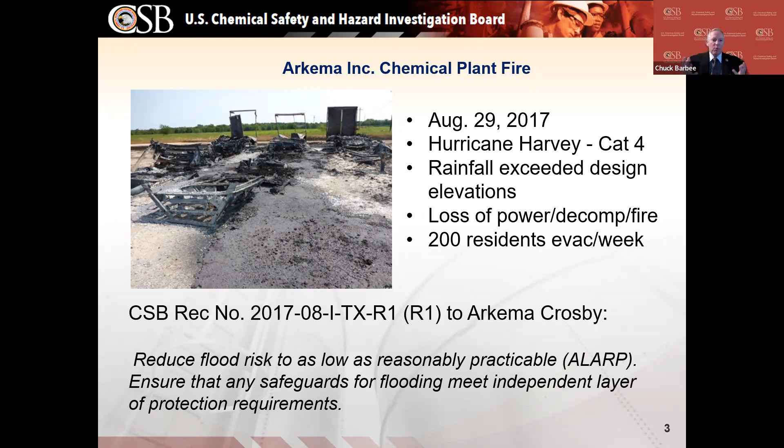Next slide, please. So in the implementation of R1, and this took a little while, I want to emphasize before we start going through it how much they had to do. They completed a site elevation survey and hydrology study. Then, based on the assessments there, they implemented all of the requirements.

They underwent a PHA using the layers of protection approaches as we recommended. And in rebuilding their facility, in addition to addressing the flood elevation issues, they had to get all of their permits back in place. And as a result of what happened, Harris County, where Crosby facility is, they updated all their permit standards. So it was quite an evolution, but they went through all the permit process for all their buildings and everything.

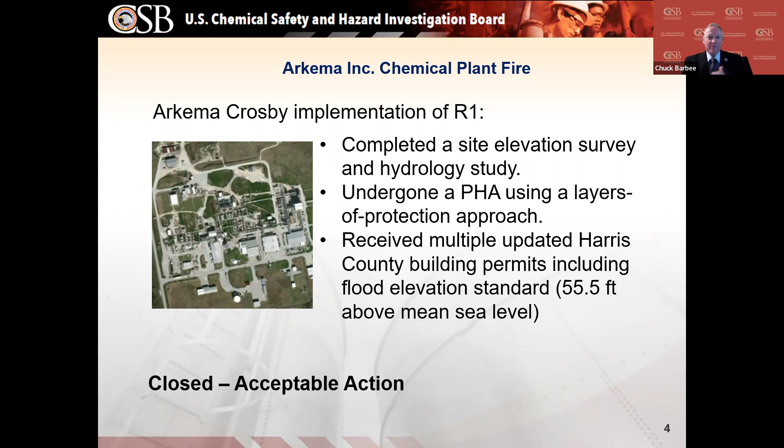They had to update all their firefighting and other components in the buildings, and they eventually did it, and they provided a tremendous amount of paperwork to evidence that they had. And as a result, the board voted to change their status to closed acceptable action. So I would say great job, Arkema Crosby facility.

The next recommendation we're going to talk about came from the pressure vessel explosion at Loy-Lange Box Company. This happened in April of 2017. A pressure vessel ruptured and propelled out of the building into another building. The rupture was due to an inadequate repair, and as a result, there were 4 fatalities. One worker who was there locally at the scene when it happened, and then 3 members of the public where the pressure vessel had propelled.

As a result of the incident and the investigation, the CSB issued a recommendation to Arise Incorporated, who were the inspectors who oversaw the repair. We asked them to include prescriptive elements in their boiler and pressure vessel repair and alteration inspection and acceptance process that would prevent acceptance of a non-conforming repair or alteration. And the reason we asked for this is actually the inspector for Arise, when he went through the process, he executed the process that they had correctly. The process just was not adequate.

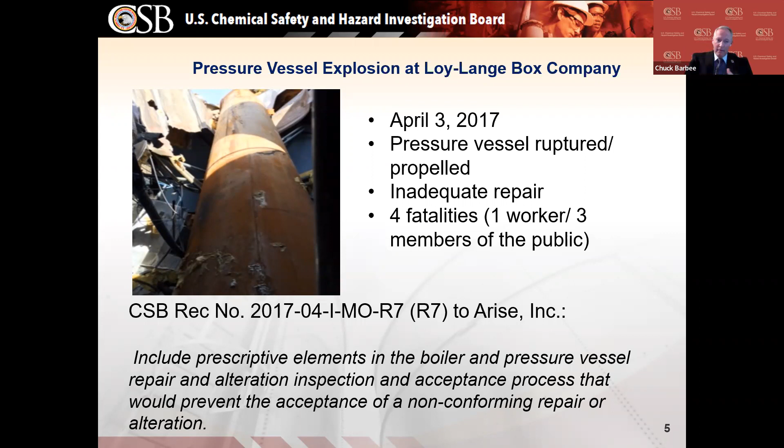Next slide, please. What did Arise do in the implementation of R7? Well, they updated their quality processes. Now that included additional inspection points, or hold points, as they refer to them, to verify repair compliance.

So in other words, a repair could be started, but until that inspector came in and verified certain aspects of it, they had to hold that repair until the inspector did buy off on it.

Now, in addition to those extra inspection points, they also put in an annual audit requirement by inspector supervisors to verify that those new inspection points were included, in addition to other things the supervisor had to verify regarding the work of the folks they were supervising. So as a result of the documentation they provided, the board voted to close this, or change the status of this recommendation to closed, acceptable action, also on January 17th. Good job to Arise Incorporated.

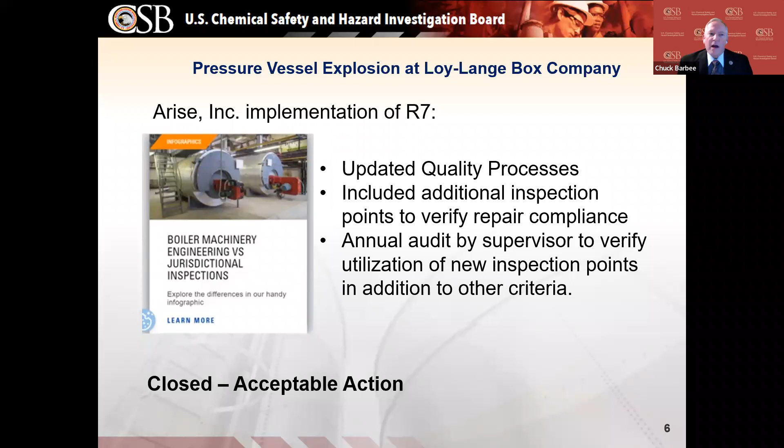Thank you, Chuck. The next presentation will be on the accidental release event that occurred at the TPC Group plant in Port Neches, Texas. Butch Griffin was the investigator in charge. Supervisory Chemical Investigator Lauren Grim will be making the presentation. Lauren, please proceed with the presentation.

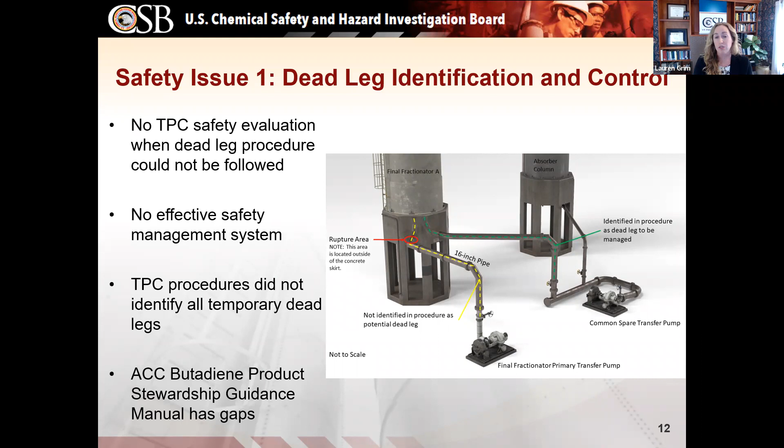In addition, TPC's dead leg procedure did not identify all potential temporary dead legs within the unit, which likely contributed to personnel not taking action to prevent popcorn polymer formation in the dead leg created by the out-of-service pump. Further, the American Chemistry Council's Butadiene Product Stewardship Guidance Manual does not contain information on the potential consequences of dead legs or how companies should identify, control, or prevent them.

The second safety issue is process hazard analysis action item implementation. TPC's 2016 PHA team recommended that TPC ensure that piping associated with out-of-service equipment and high purity butadiene service be flushed monthly. Implementation of this recommendation could have helped prevent the incident by requiring personnel to flush the piping associated with the out-of-service pump, which could have prevented the buildup of popcorn polymer within the dead leg. However, the 2016 PHA recommendation was never implemented, and the dead leg conditions leading to the incident were not mitigated.

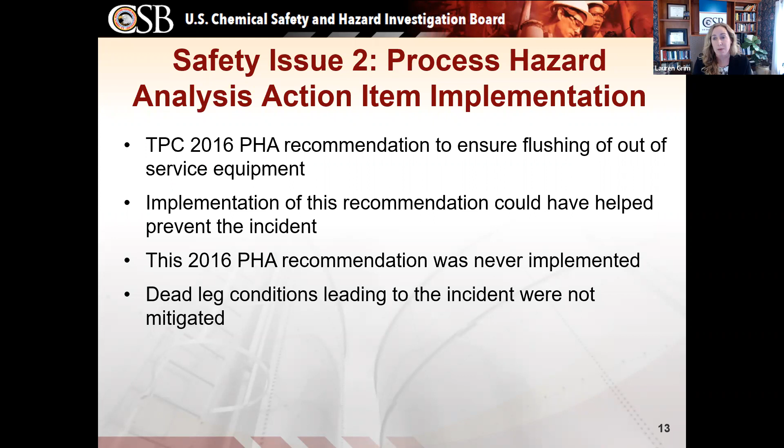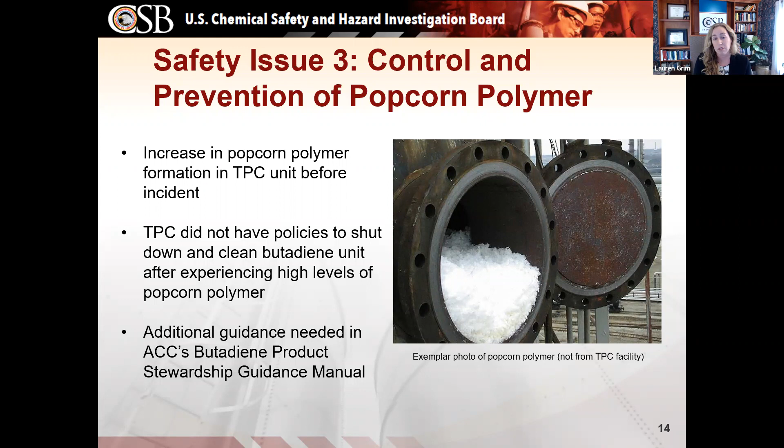Our third safety issue is the control and prevention of popcorn polymer. TPC was conducting operational trials leading up to the incident, and after these trials began, an increase in popcorn polymer formation occurred throughout the butadiene unit. The CSB determined that TPC did not have sufficient internal policies to lead employees to shut down and clean the butadiene unit after it experienced exceedingly high levels of hazardous popcorn polymer. The CSB also determined that additional guidance in the American Chemistry Council's Butadiene Product Stewardship Guidance Manual, providing mitigation strategies that facilities should follow when popcorn polymer is identified, could help prevent future popcorn polymer-induced loss of containment events.

And the fourth and final safety issue is remotely operated emergency isolation valves. The TPC butadiene process was not equipped with remotely operated emergency isolation valves designed to mitigate process releases remotely from a safe location. The TPC incident demonstrates what can happen when portions of a chemical processing facility cannot be remotely isolated during a release and fire.

Severe explosions caused a process tower to propel through the air and land within the facility, other process towers to fall within the unit, extensive facility damage, and fires that burned for more than a month. Manual and locally controlled emergency block valves are unreliable in this type of catastrophic incident, since the valves cannot be safely accessed in these major incidents, the equipment cannot be isolated.

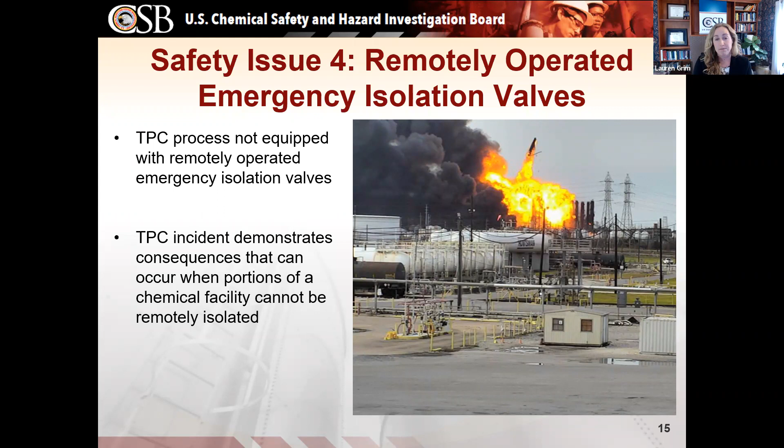The CSB issued five recommendations as a result of this investigation. To TPC, the CSB recommends that: 1, TPC develop and implement a program to identify and control or eliminate dead legs; 2, that TPC passivate equipment in high purity butadiene service; and 3, that TPC incorporate the recording of any paper-based process performance information into TPC's electronic records management system.

To the American Chemistry Council, the CSB recommends that: 1, the ACC revise the Butadiene Product Stewardship Guidance Manual to include guidance on identifying and controlling or eliminating dead legs in high purity butadiene service; and 2, that ACC revise the manual to provide guidance on a methodology to identify what should be considered excessive or dangerous amounts of popcorn polymer and mitigation strategies.

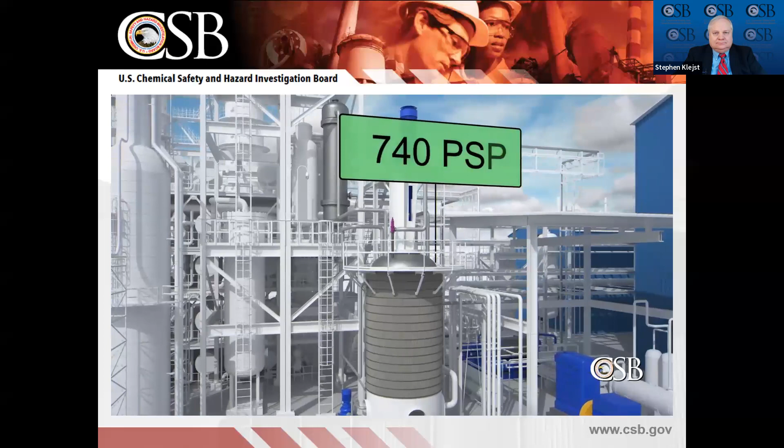Kuraray shut down the Pasadena plant on April 6th for a maintenance turnaround and to install various equipment upgrades. By May 18th, Kuraray operations personnel were taking steps to bring one of 4 reactors back online. The reactor, known as Eval Reactor 2, looked similar to the others, but had a lower maximum design pressure of 740 psi. The design pressure of the other 3 reactors was 1150 psi.

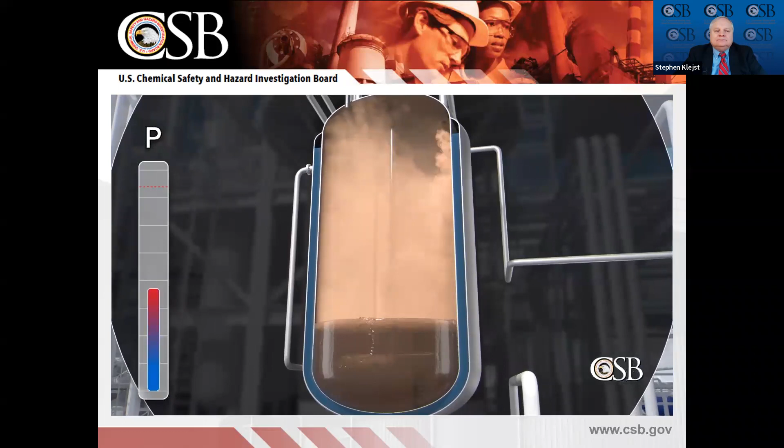The reactor already had liquid methanol and ethylene vapor inside as operators began incrementally raising the reactor system pressure. They did so by adding additional ethylene vapor. Pressure was raised in order to reach the target pressure necessary for the reactor to start up, while also checking for leaks. In the meantime, chilled liquid from the plant's newly installed refrigeration system was circulating through the reactor's heat exchanger.

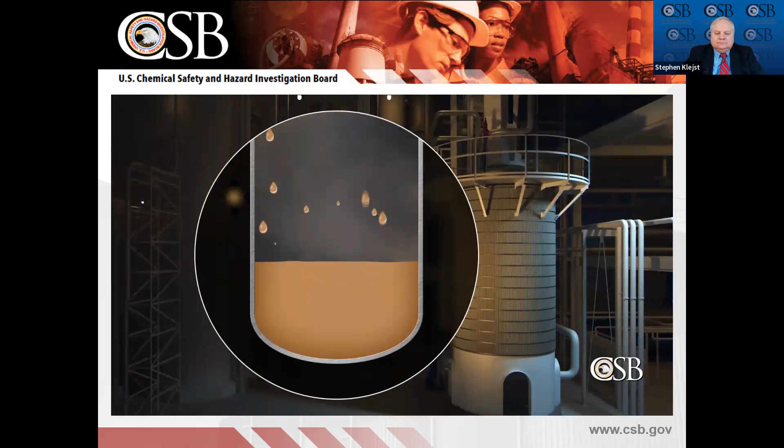After 11:20 p.m., the reactor pressure, together with the low temperature from the chilled liquid, created conditions that allowed the ethylene gas in the reactor to condense to liquid. This caused the temperature in the reactor to decrease. Around 7 a.m. on May 19th, a supervisor noticed the low temperature in the reactor and instructed operators to stop circulating the chilled liquid through the heat exchanger.

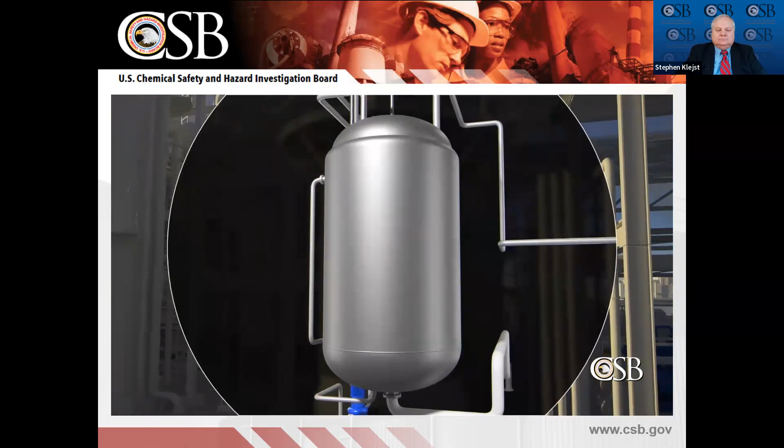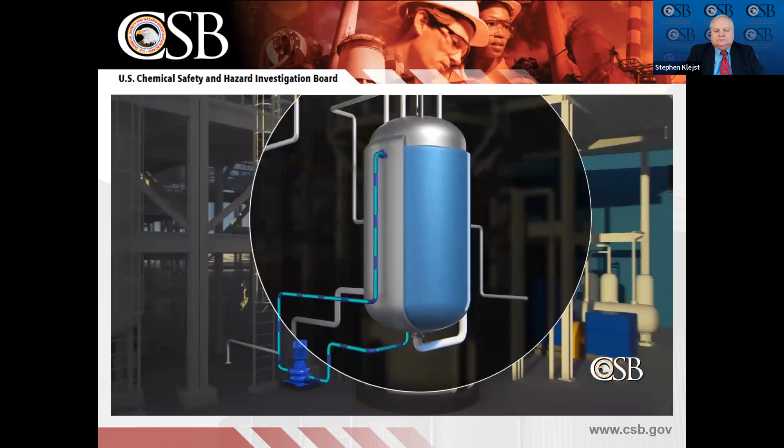The reactor was surrounded by a heat transfer jacket, which uses water to control the temperature inside the reactor. To further help warm the reactor, Kuraray personnel periodically added steam to the jacket, increasing the temperature of the water.

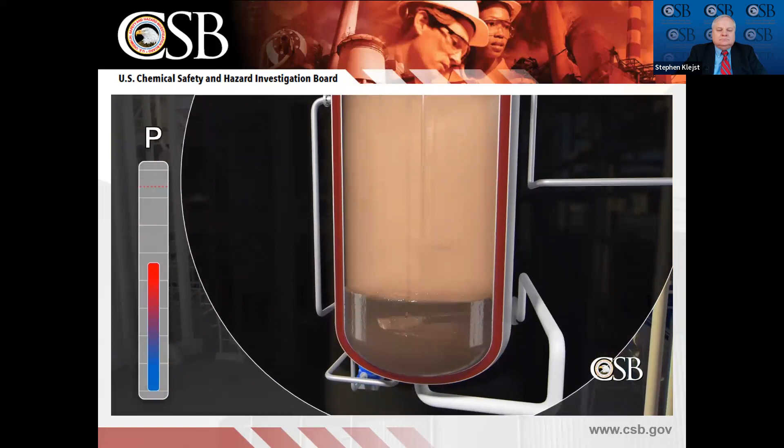As the temperature of the reactor increased with each injection of steam to the heat transfer jacket, some liquid ethylene inside the reactor vaporized. This raised the pressure inside the reactor. By about 8:45 a.m., the reactor reached the target operating pressure of nearly 600 psi, but pressure continued to increase.

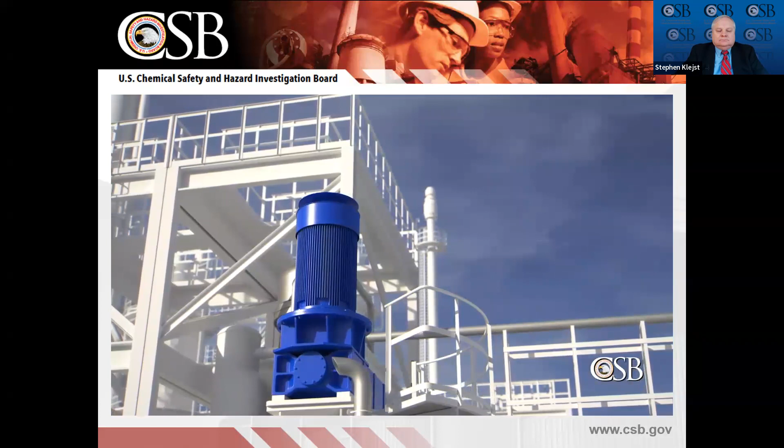Around 9 a.m., the pressure reached 640 psi, and the high-pressure alarm went off. A board operator responded by periodically opening a pressure control valve to send some of the vapor inside the reactor to a flare. The board operator was concerned about exceeding environmental emissions limits for the flare, so he did not fully open the pressure control valve.

He was also focused on other startup activities and did not realize the valve was not open as much as it needed to be to bring the pressure under control. Pressure inside the reactor continued to climb.

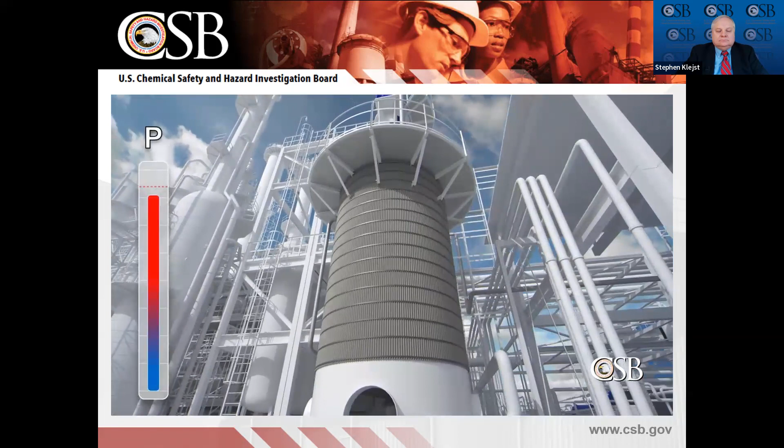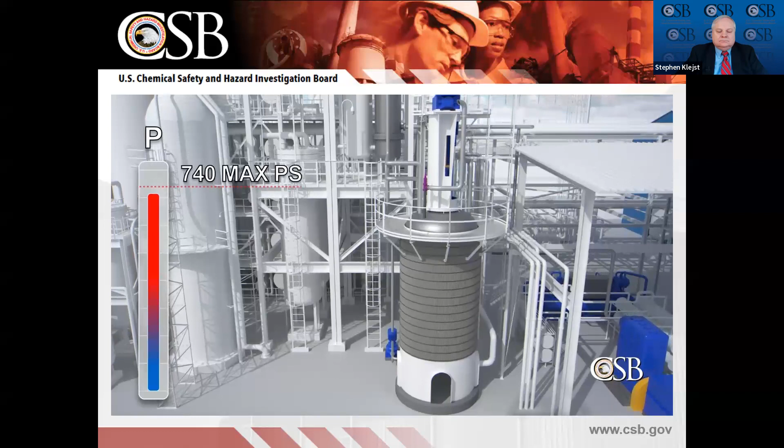Shortly after 10 a.m., operators initiated the next step in the startup. At that time, a new board operator took over and noticed the pressure in the reactor was over 700 psi. But the operator did not recall that this reactor had a maximum design pressure of 740 psi. He thought it could withstand higher pressure like the others.

Like the first board operator, the new operator only partially opened the pressure control valve, not realizing how dangerously close the pressure was to the reactor's limit. The partially open control valve was not enough to relieve the pressure in the reactor.

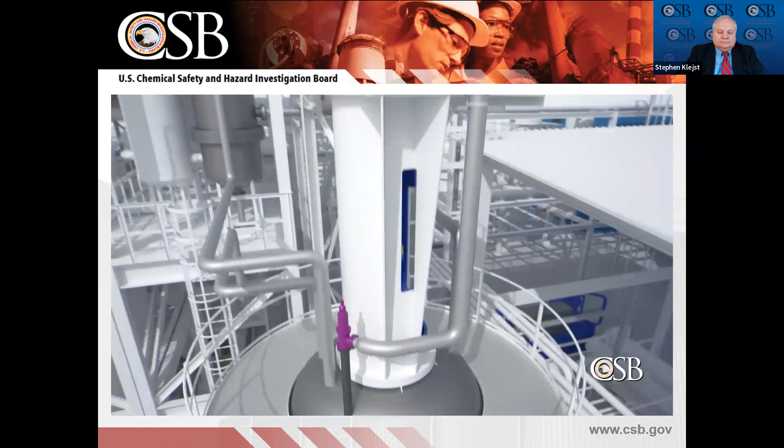Shortly before 10:30 a.m., the emergency pressure relief system activated. High-pressure ethylene vapor discharged from the reactor into the atmosphere. It was released horizontally toward an area where many people were working, rather than vertically to a safe location. Soon after, a nearby welding machine likely ignited the vapor, and a large fire erupted.

23 people were injured, many as they urgently tried to evacuate. The ethylene-fueled fire stopped after approximately 3 minutes, when the emergency relief valve closed as pressure in the reactor normalized. In total, over 2,000 pounds of ethylene was ejected to the atmosphere.

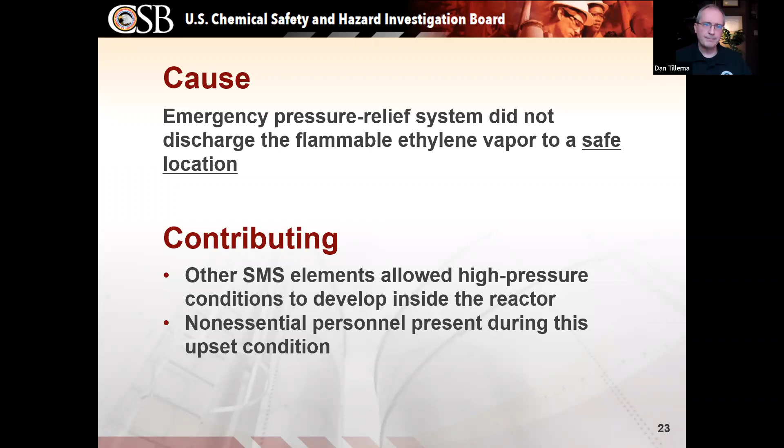Our report details these 17 safety issues identified during the investigation. There are also 47 findings that stem from these safety issues. As a result of these findings, the CSB issued 12 safety recommendations to address the gaps that still existed between our investigation findings and Kuraray's own post-incident corrective actions.

In our discussion today, we are focusing on the first of the 17 safety issues: the emergency pressure relief system discharge design.

Of all the factors that contributed to injuring the 23 workers, none was more significant than the design of the outlet piping from the reactor's emergency pressure relief system, which caused the release to be aimed toward an area where workers were present. Had Kuraray designed this piping to discharge the flammable ethylene vapor to a safe location, this incident could have unfolded in precisely the same sequence, but without harming people.

With well-designed outlet piping, the emergency pressure relief system should have discharged the excess flammable ethylene vapor vertically upward, well above and safely away from workers.

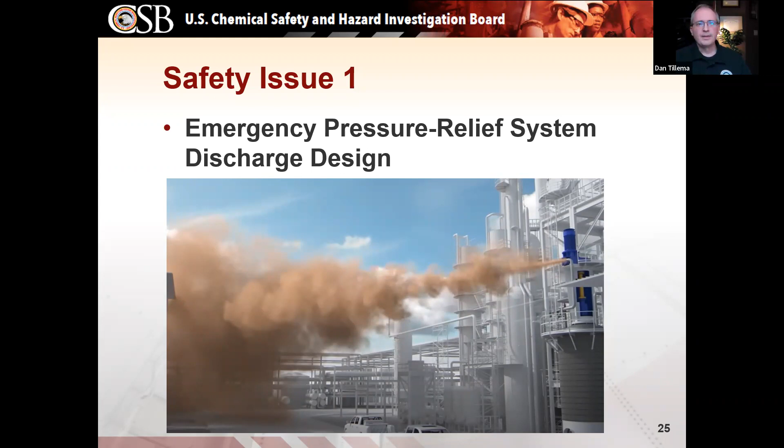Kuraray's emergency pressure relief system did not and does not discharge ethylene vapor to a flare.

The CSB has historically advocated against discharging flammable vapor into the ambient air when a flare system can serve both to contain the flammable vapor and then combust it safely. The CSB has stated that a flare system is an inherently safer option compared with dispersing flammable vapor into the atmosphere. Nevertheless, industry standards do provide users with guidance for directing flammable vapor vertically upward into the ambient air safely.

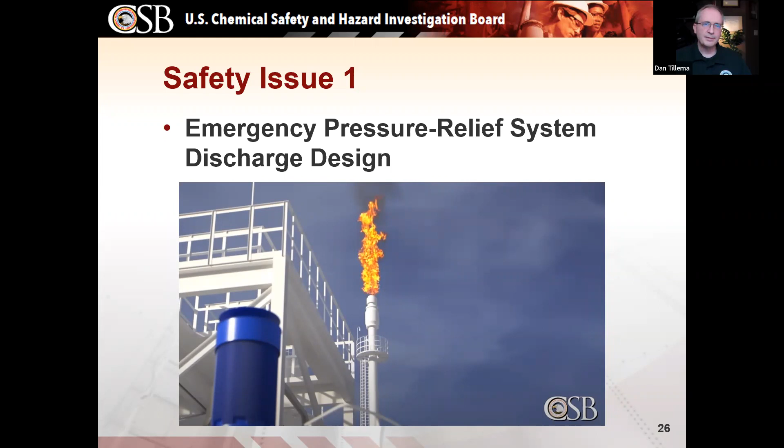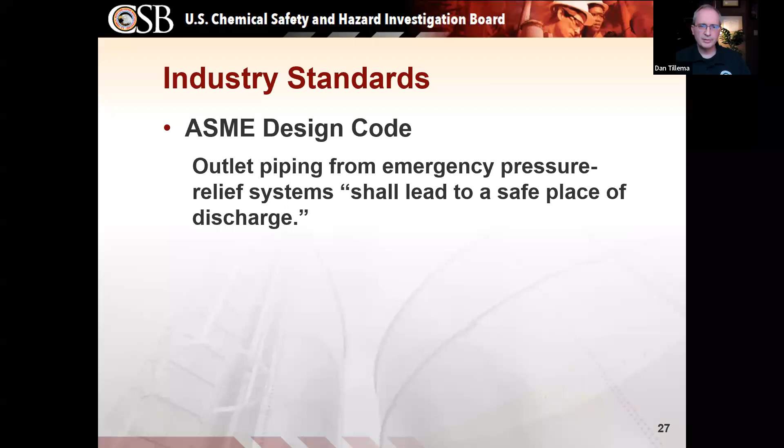The American Society of Mechanical Engineers Design Code, which is used to build many of the vessels in the chemical industry, including Eval Reactor 2, requires that outlet piping from emergency pressure relief systems shall lead to a safe place of discharge.

API states that published industry studies have shown that flammable gases can be discharged into the air safely by following the design guidelines in API 521. Among other considerations, emergency pressure relief system outlet piping should direct the release of flammable vapor vertically upward to satisfy these design guidelines.

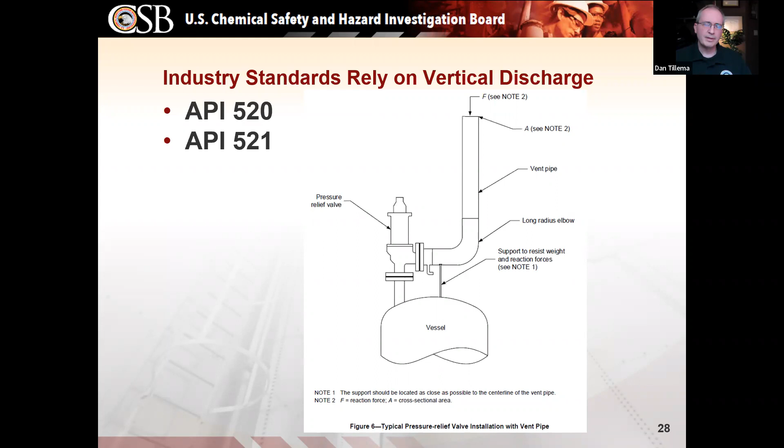Existing industry standards also answer the question of what is an unsafe location. API defined an unsafe location for discharging flammable vapor from emergency pressure relief systems in its industry guidance document, Performance Indicators, API 754.

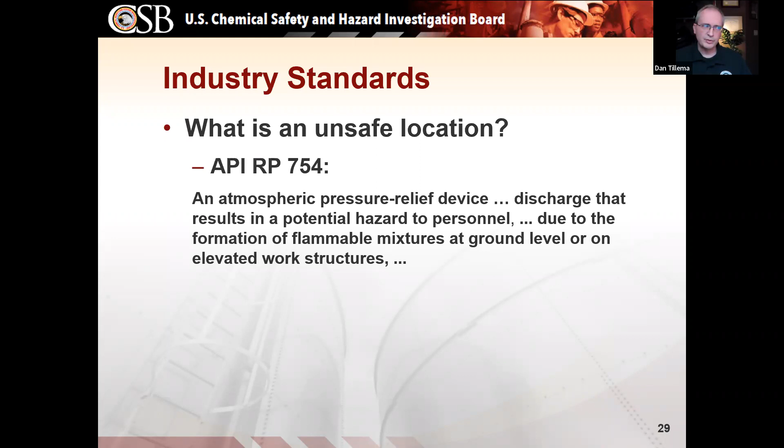According to API 754, an unsafe location includes an atmospheric pressure relief device discharge that results in a potential hazard to personnel due to the formation of flammable mixtures at ground level or on elevated work structures.

30 years ago, OSHA issued its final rule for what we now commonly call the PSM standard. In the preamble of this standard, OSHA stated: releases of toxic, reactive, or flammable liquids and gases in processes involving highly hazardous chemicals have been reported for many years.

Recent major incidents include the 1984 Bhopal incident, resulting in more than 2,000 deaths; the October 1989 Phillips 66 chemical plant incident, resulting in 23 deaths and 132 injuries; the July 1990 Arco chemical incident, resulting in 17 deaths; the July 1990 BASF incident, resulting in 2 deaths and 41 injuries; and the May 1991 IMC incident, resulting in 8 deaths and 128 injuries. Of the 5 chemical disasters that OSHA cited, 2 of these events, Bhopal and BASF, involved discharging chemicals from emergency pressure relief systems in a manner that caused great harm to people.

Notably, the BASF event resulted from not ensuring that a reactor's emergency pressure relief system discharged flammable chemicals to a safe location. The facts, conditions, and circumstances of the Kuraray incident show that the emergency pressure relief system for Eval Reactor 2 did not discharge to a safe location.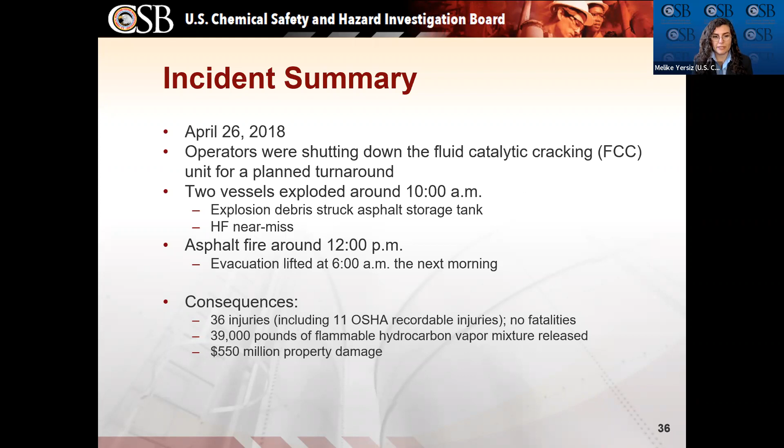Next slide, please. This picture was taken after the explosion, but before the asphalt fire. In the middle of the image, the star marks the location of the explosion. To the right, you can see tank 101, the asphalt storage tank, with asphalt pouring out of its side wall. It actually was high enough in the tank wall that the asphalt spill jumped over the containment wall and spread to the rest of the refinery.

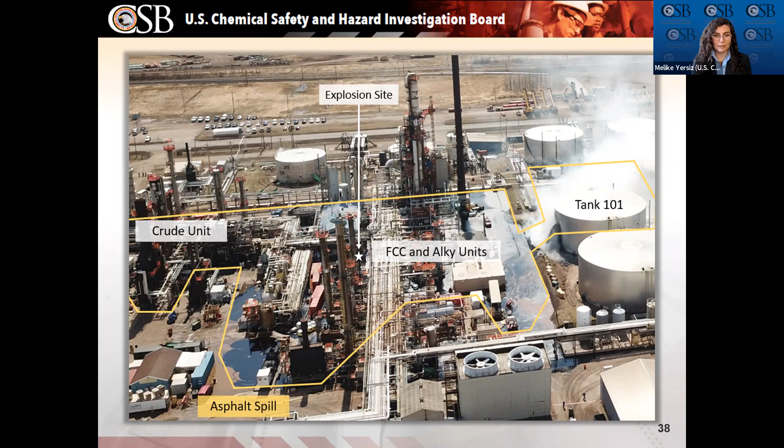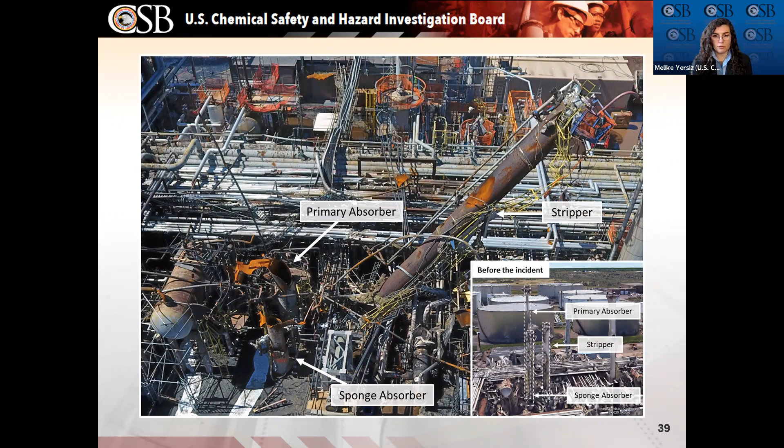Next slide, please. This is what remained of the two vessels that exploded, the primary absorber and the sponge absorber that you see on the left. Before the incident, these two distillation columns were actually taller than the toppled over column you see in this image right next to them.

Next slide, please. There were over 100 pieces that were scattered throughout the refinery, ranging from a couple inches to several feet. These are some photos of the larger pieces recovered after the incident. Next slide, please.

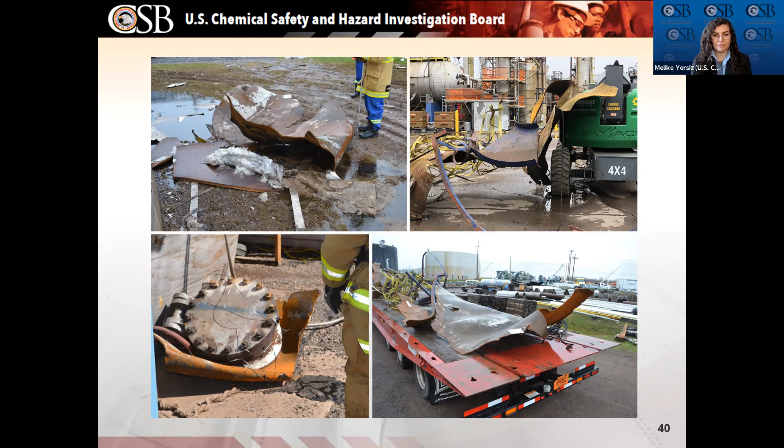The CSB determined that the Husky Superior Refinery explosion, which occurred during the shutdown of the FCC unit, was caused by inadvertently directing air inside the regenerator through the reactor and the main column, and then into the gas concentration unit. As the air continued flowing into the gas concentration unit, oxygen accumulated and formed a flammable mixture inside the two vessels that exploded. The oxygen also reacted with existing pyrophoric material inside this equipment, creating the ignition source for the explosion.

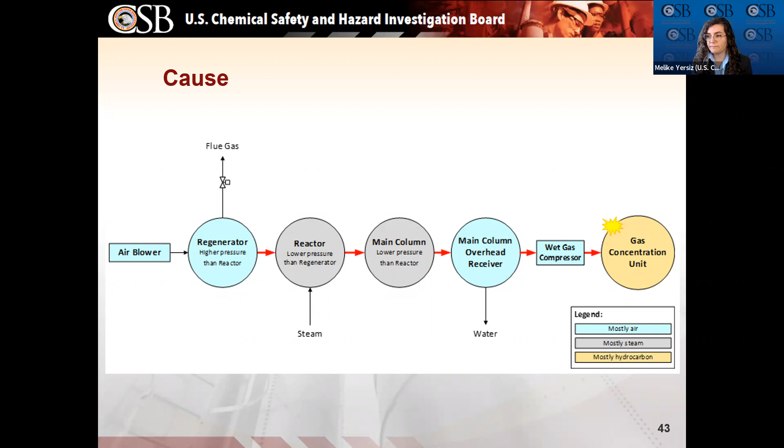The CSB identified 6 safety issues that caused this incident, and I will briefly go over them now.

The first safety issue is transient operation safeguards. Transient operation is defined as the operating mode when the process is in transition and is not in its normal operations mode. Examples include startups, shutdowns, standby, and emergencies. These are typically procedure-based operations, meaning workers follow a written step-by-step procedure to complete a task. In this case, it was an FCC unit shutdown, which occurred typically once every 5 years.

The CSB determined that during the FCC unit shutdown, the refinery's transient operation safeguards were either not implemented or not effective. For example, the refinery did not implement a reactor steam barrier, which involves injecting steam into the reactor to raise its pressure to prevent air and hydrocarbon from mixing inside the process unit. The refinery also didn't implement a main column gas purge, which could have prevented accumulation of oxygen inside the equipment.

The refinery only relied on catalyst slide valves for protection. These slide valves are between the reactor and the regenerator, and it's known in industry that they're not gas tight and they're not positive isolation devices. In this case, one slide was eroded, which made it more likely for air to leak into the rest of the process unit.

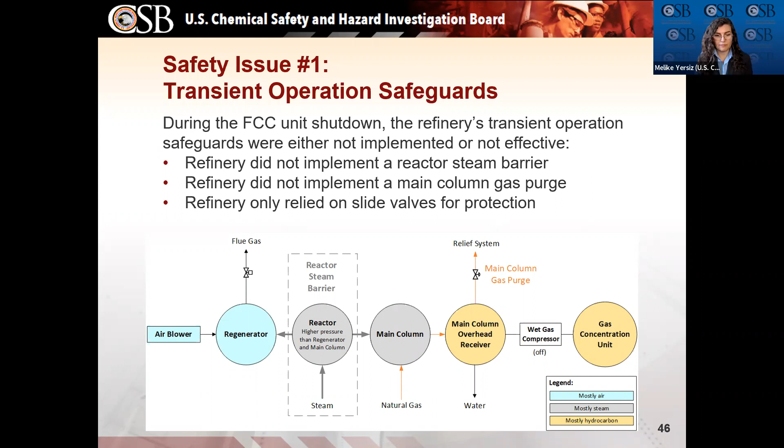The second safety issue covers process knowledge. The CSB determined that the refinery's FCC technology knowledge was not sufficient to safely shut down the FCC unit. The refinery's FCC expertise was mainly in-house with minimal engagement with other refineries. Furthermore, the shutdown procedure had not been technically evaluated for at least 25 years prior to the incident, and possibly since it was first created in 1960 when the unit was built.

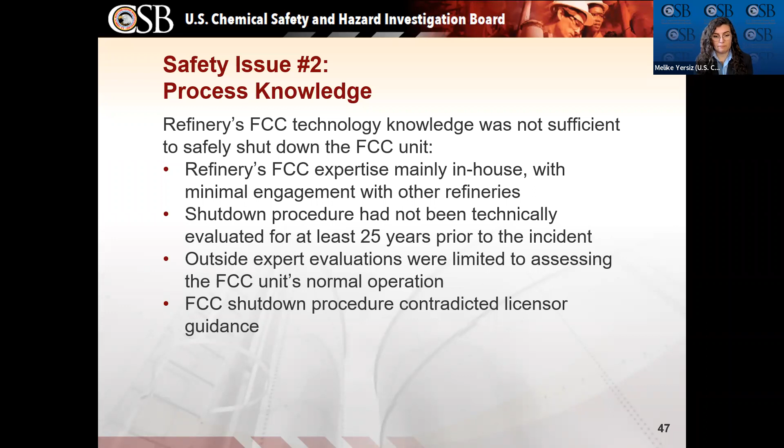Outside expert evaluations were limited to assessing the FCC unit's normal operation. As a result, for many years, refinery employees were not aware that their FCC shutdown procedure contradicted licensor guidance and put the FCC unit in an unsafe posture while they were shutting down every time.

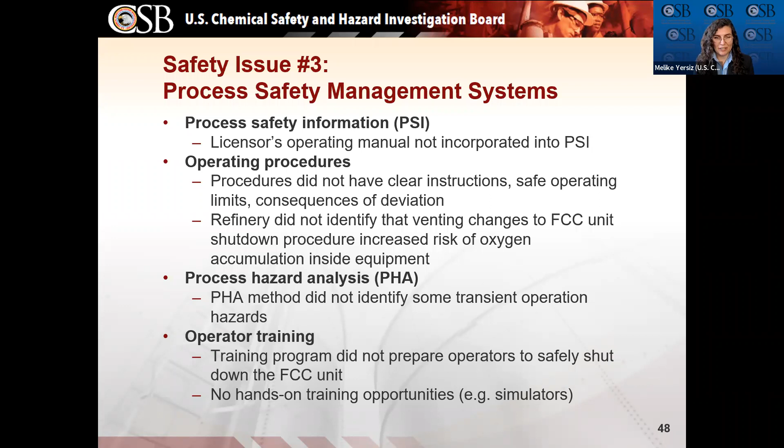The third safety issue covers process safety management system elements that contributed to this incident. The four that are discussed in this report are process safety information, operating procedures, process hazard analysis, and operator training. I will not go through them in detail here, but you can find more details in the report.

The fourth safety issue looked into industry knowledge and guidance. The Superior incident occurred less than a year after the CSB released its final investigation report in a similar 2015 FCC unit explosion in Torrance, California. In the Torrance incident, hydrocarbon flowed from the main column into the reactor, into the regenerator, until it found an ignition source in the flue gas system. Similar to the Superior incident, the CSB found that one of the causes of this incident was that the steam barrier was compromised.

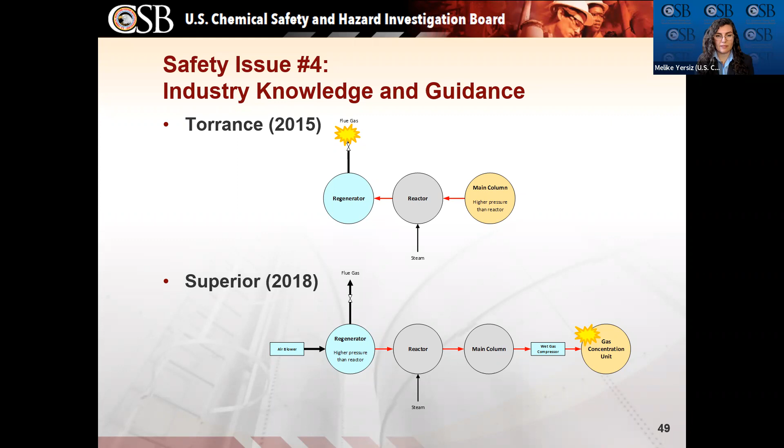The CSB determined that the Husky Superior refinery knew about the Torrance incident, but the workers did not recognize that inadvertent flow in the reverse direction was also possible. In addition, a lot of workers were not aware of the reactor steam barrier concept. The CSB determined that similar knowledge gaps may exist at other US refineries.

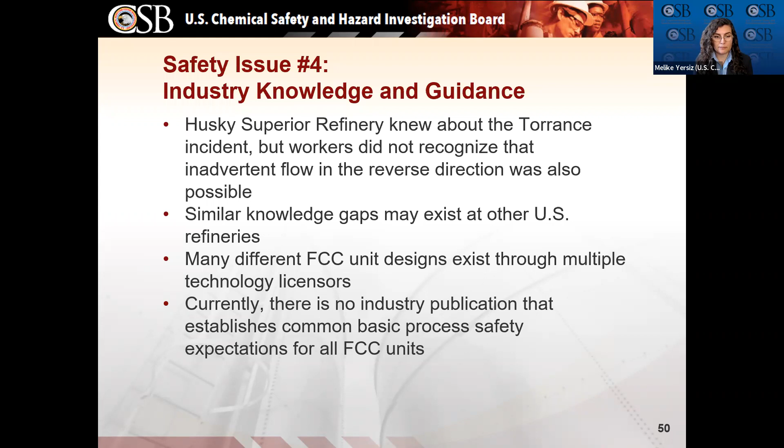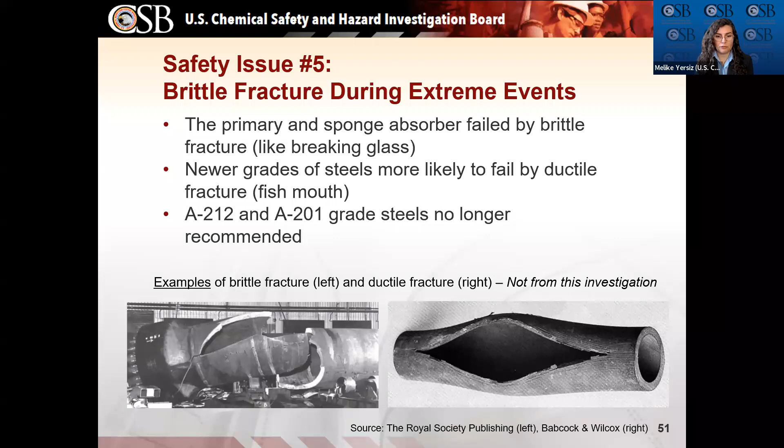The fifth safety issue talks about the materials of construction of the two vessels that exploded. These vessels were constructed in 1960, and the materials used in these constructions are no longer recommended for this service. The Superior refinery in its rebuild has constructed these vessels out of newer grades of steels, which are more likely to fail by ductile fracture. Had the vessels not failed through brittle fracture, there would be fewer flying projectiles that damage surrounding equipment during the explosion.

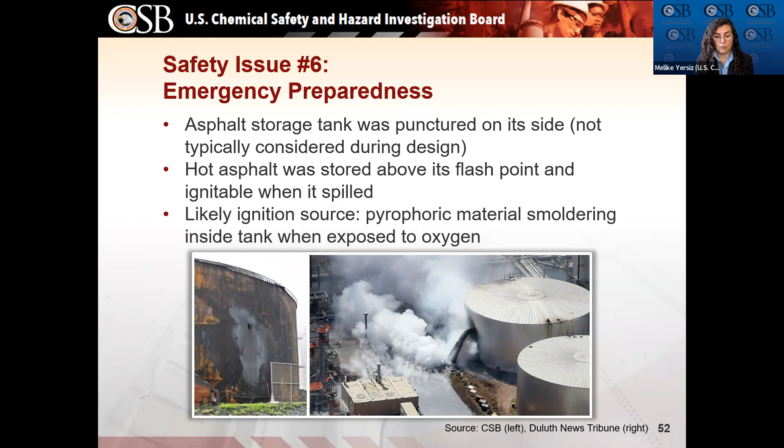The final safety issue examines the asphalt fire aspect of this incident. The asphalt storage tank was punctured on its side, and this is not typically considered during design evaluations for tanks and tank farms. In addition, the hot asphalt was stored above its flash point, which meant that once it was spilled, it could be ignited through a nearby ignition source and catch fire. The CSB determined that the likely ignition source actually came from inside the storage tank. Pyrophoric material inside the tank would have smoldered when exposed to oxygen when the hole was created on the side of the tank.

The CSB made 16 recommendations to prevent future recurrences of similar incidents. Many of these recommendations are to Cenovus Energy, the current owner of Superior Refinery. Superior Refinery is still in its rebuild and is expected to start later this year.

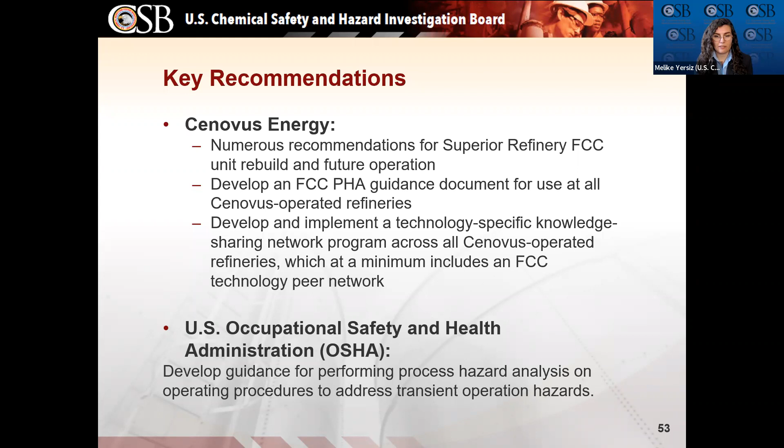Two of the major industry recommendations that came out of this investigation are to the Environmental Protection Agency, EPA, and the American Petroleum Institute, API. The CSB recommends that the EPA inspect each refinery that operates an FCC unit in refineries that operate HF alkylation units. This is to ensure that the FCC units in these refineries have the safeguards they need to prevent explosions similar to those seen at the Torrance Refinery in California and the Superior Refinery in Wisconsin.

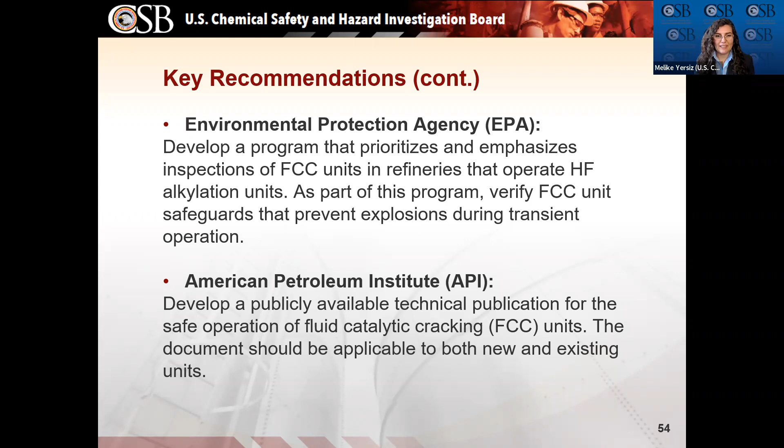In addition, the CSB recommended that API develop a technical publication for the safe operation of FCC units. We believe that once this document is available, it will drive chemical safety change across all FCC units in the United States. That concludes my presentation. Thank you very much, and I turn it back over to Steve Kleist.